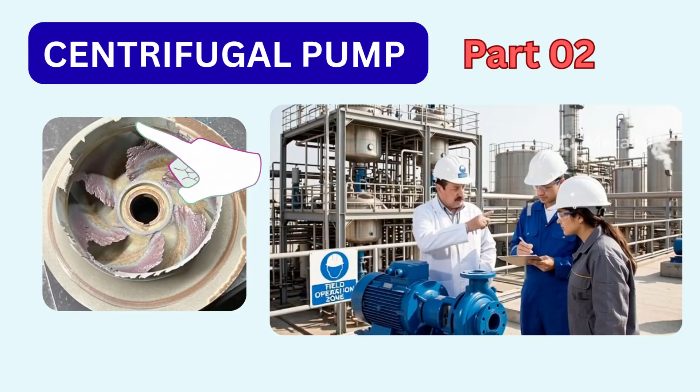Chapter 4, the number one enemy: cavitation. When suction pressure drops below the liquid's vapor pressure, the liquid flashes into vapor. Bubbles form at the impeller eye. If you want to know more about the cavitation phenomenon, stay with us.

These bubbles travel to the high-pressure side and collapse violently. Each implosion creates a microjet that literally tears metal from the impeller surface.

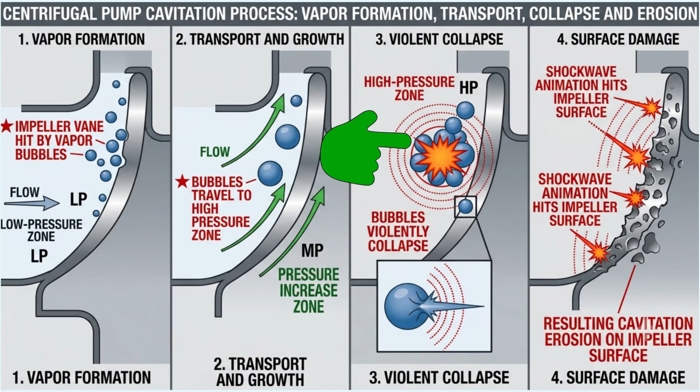In detail, the following stages are distinguished in cavitation: 1. Vapor formation. 2. Transport and growth. 3. Violent collapse. 4. Surface damage.

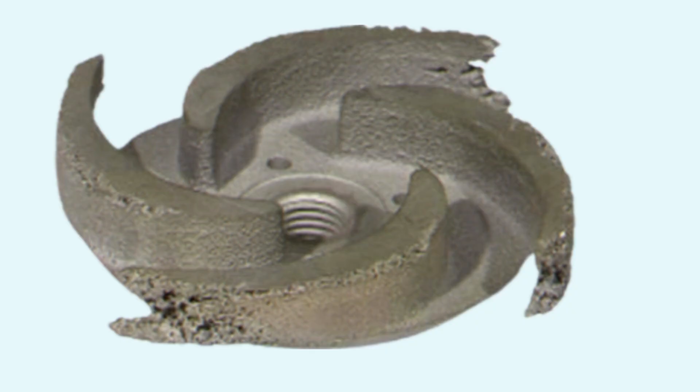You would see the result? Here are the consequences of dangerous cavitation phenomenon: pitting, erosion, even complete impeller destruction. It sounds like you're pumping gravel, and it kills pumps fast.

Prevention requires understanding NPSH, net positive suction head. NPSHa is what your system provides. NPSHr is what the pump requires. The rule is simple: NPSHa must be greater than NPSHr.

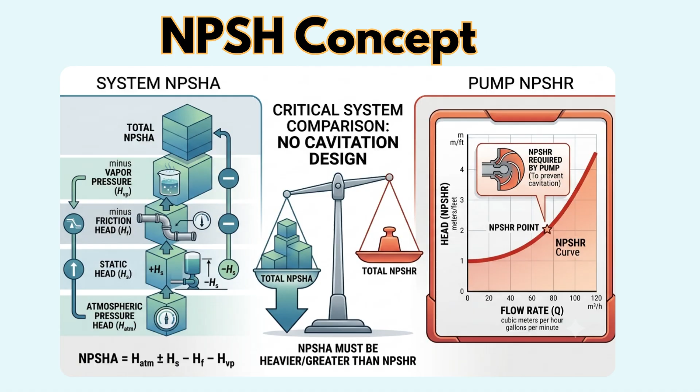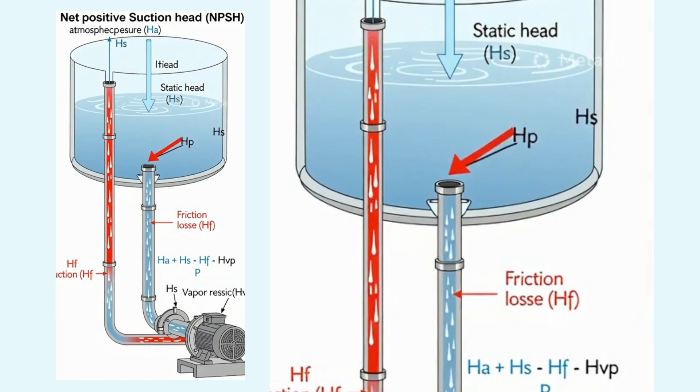NPSHa depends on atmospheric pressure, static head from your tank, minus friction losses in the suction pipe, minus the liquid's vapor pressure. Every meter of friction hurts you.

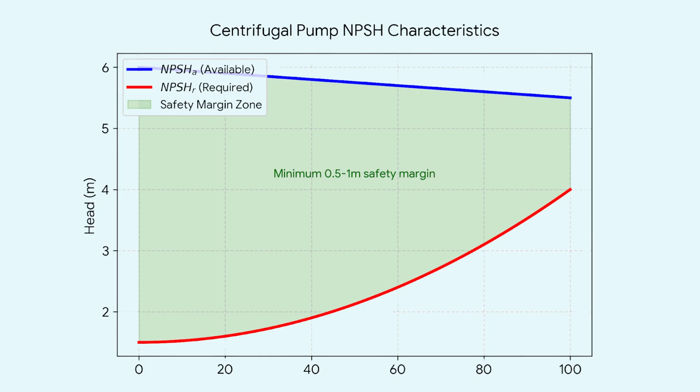Now we give you a valuable advice: always maintain a safety margin of at least half to 1 meter. Don't cut it close. Temperature increases vapor pressure, which reduces your available NPSH.

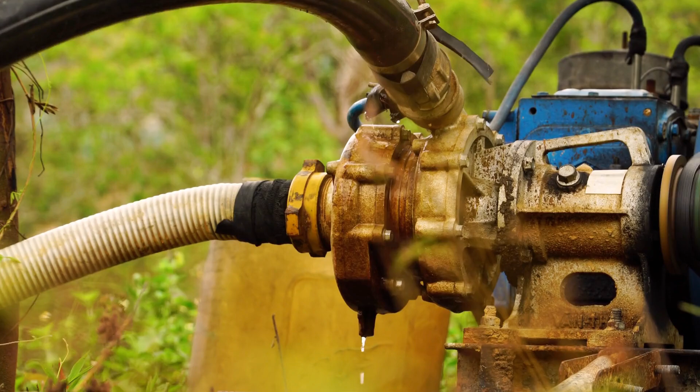Chapter 5, Best Practices and Maintenance. Practice 1, Priming. Centrifugal pumps cannot pump air. They must be completely filled with liquid before startup. Always vent air from the casing.

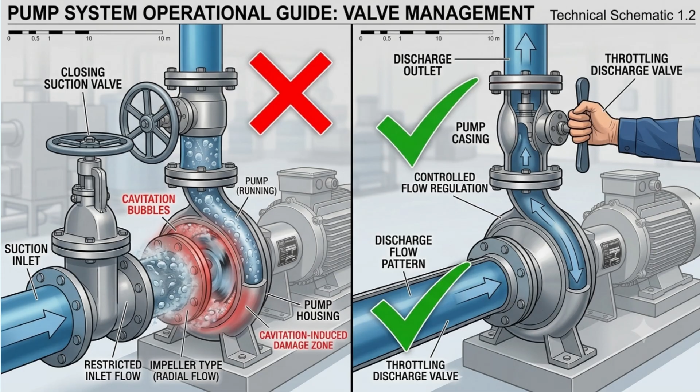Practice 2, Valve operation. Never throttle the suction valve while running, that causes instant cavitation. Always control flow from the discharge side.

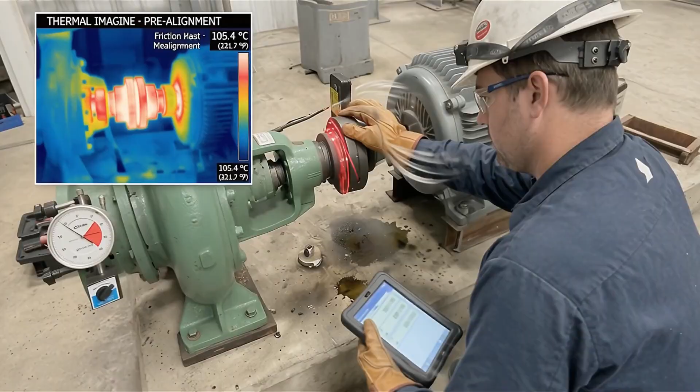Practice 3, Alignment. Misalignment between pump and motor is the number one cause of bearing failure. Use laser alignment tools and thermal camera.

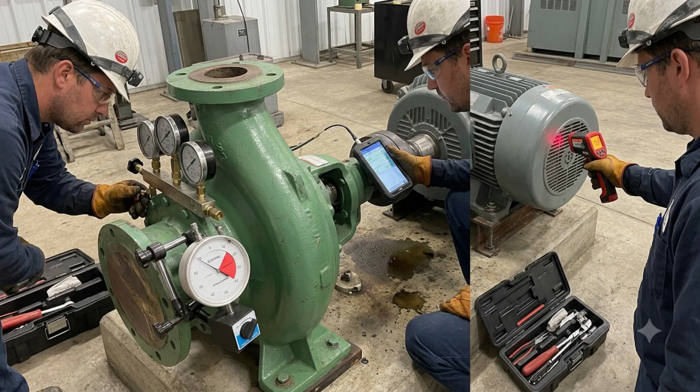Check it regularly. Monitor pressure, vibration, temperature, and sound. Changes in any of these indicate problems developing. Catch them early. Let's summarize.

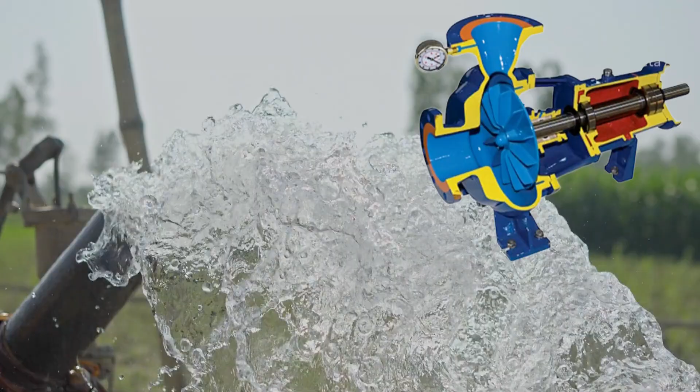1. Centrifugal pumps convert velocity to pressure using an impeller and volute. 2. Analyze the performance curve and operate near the best efficiency point. 3. Guard your NPSH to prevent destructive cavitation.